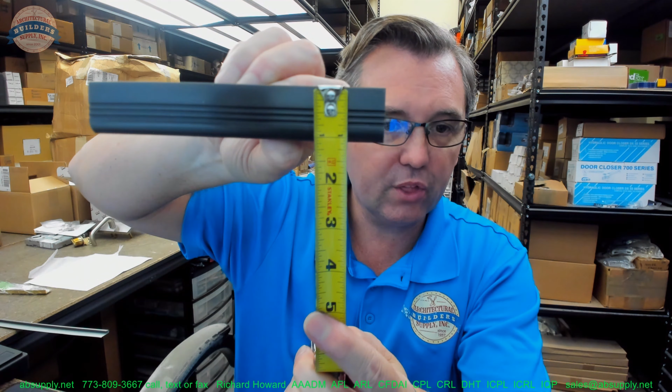Okay, so this is listed in lots of different lengths. 2 foot to 8 foot are probably listed. You can have really any size you want. We're only limited by the length of the extrusion. And this extrusion may be 16.5 feet for all I know at the factory. I want to measure this so that I give you all of the dimensions. Overall width, about 1 3/8 inches, and that's what they call it out as. 5/16 overall height, very short little guy here.

Okay. Now, again, this is a sample piece. If this was the genuine article, you'd have a brass hook strip. You'd have holes drilled and countersunk, and as a general rule, not an absolute rule, for whatever length you have, if it's a 3-foot piece, you'll probably have 4 holes drilled and countersunk. You'll have screws that will be in a complementary finish, and in this case, it would be brass screws as well. So be very mindful of that brass screw, very soft base material.

If you have need for a custom length, by all means, order the next longest piece or pieces, and simply indicate in the comment field the length that you'd like for us to cut the material back to. And that's what we'll do. The reasoning is, look at the end of that. Very clean cut factory edge, and it's finished.

You go ahead and you cut that. You may not have the best tool for cutting this, and you likely won't have the ability to finish that edge off. Not that you would ever see it, but you might, and you might just want the factory to give you a nice finished edge as well. Okay. Let's switch to the screen view where we can take a closer look at some supporting concepts.

Here is the item that we are looking at now. Admittedly, this is just a 24-inch length, but it doesn't really matter. Here are our dimensional properties of this item. Okay. Brass, oxidized, and oil rubbed. The J-hook included when purchasing the 101. Typically mounted on an existing saddle type threshold to create an interlock with a J-hook or an L-hook, and we're going to talk about both of those here in a moment.

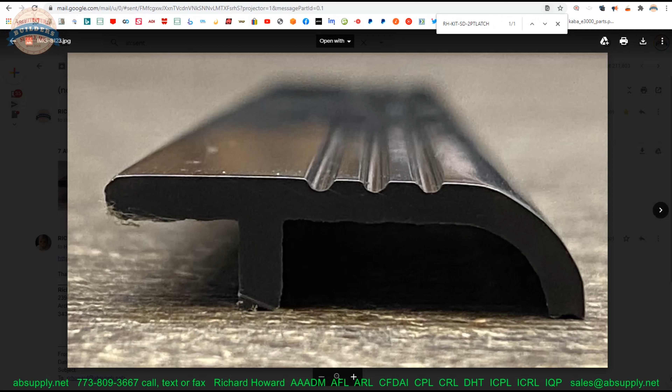I do have some images that I can show you. That's what it looks like up close, cross section. My sample did have a little bit of a nick on it on the corner. You can see that brass tone underneath it.

Okay, so now the item that we are looking at here, there is a link here to the manufacturer's page. When we click on that, we'll be able to pull up not only all of the Pemko products that we sell, but also a link to the manufacturer's website, as well as the catalog. So let's open up the catalog, because I want to draw your attention to what the hook strip is, the J and the L, the 101.

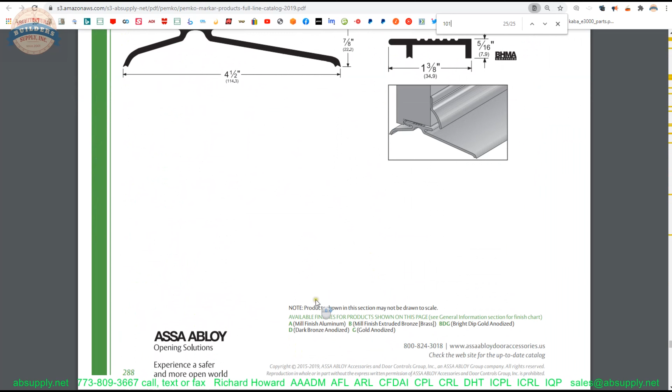Just doing a find function on our keyboard where we can get to that interlock style threshold, and there it is. Okay, so that's what it looks like in the catalog. The 2019 catalog has it on page 288. So this section is residential thresholds. That is generally where you will see it, and that's a great image showing what the installation would look like.

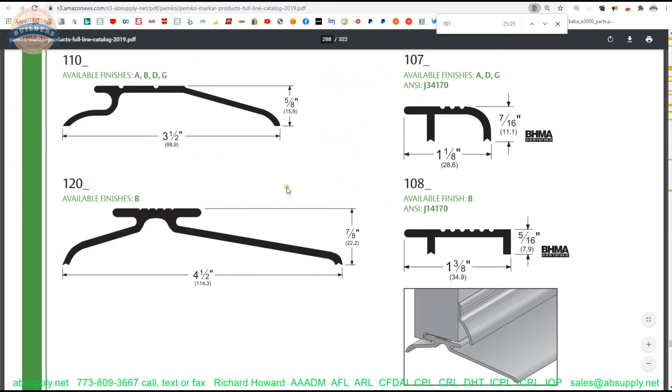Having a drip cap is really low-hanging fruit as well. I would always recommend the inclusion of a drip cap. You can see that there is this more flat profile that they have here, and then a taller version in the 107. Other interlocking thresholds are also here, and here's the page I wanted to draw your attention to.

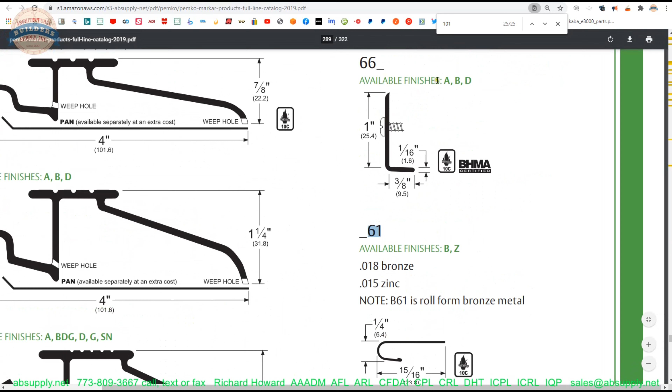The J hook is the B61. That would be the appropriate part number for this item. An L hook would be a 66B. Okay, so where would you use that L hook? Well, let's illustrate where we would probably use it.

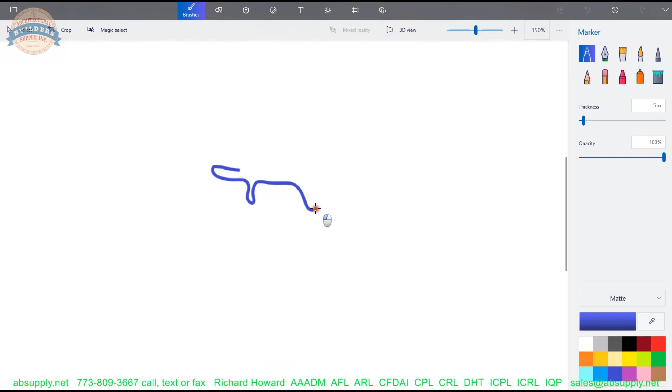Sorry, I am an awful artist. That's to be sure.

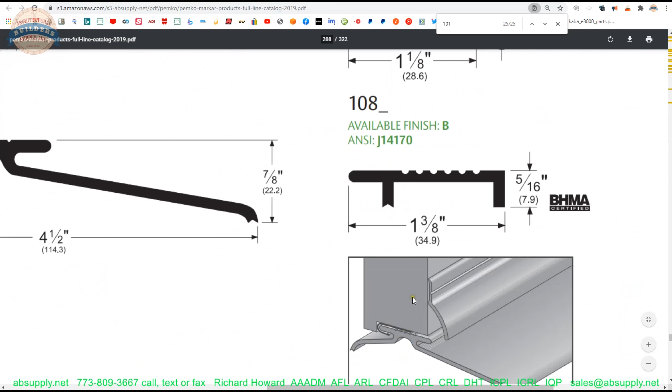So that's our 101. So you can have your door. So as we showed in this image here, you get the concept of how that's going to install. Okay, but that's only one way of doing it, and in fact, that's the less common way. So you can certainly install it like they're showing here, where your hook comes around like this, roughly speaking.

Now, most people are just going to install it like this. That's really how you see it. But to make a mortise in the bottom of the door is a lot more elegant. Better way to end up doing that. Okay, so however you go about doing it is how you go about doing it. What's nice about it is it will draw that door down further and render a more effective overall seal, because it's not just straight across at this point.

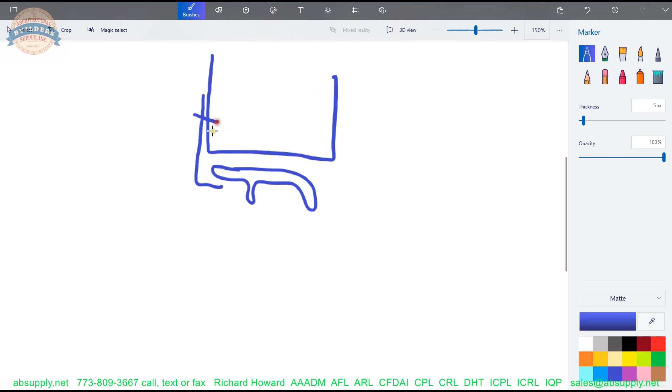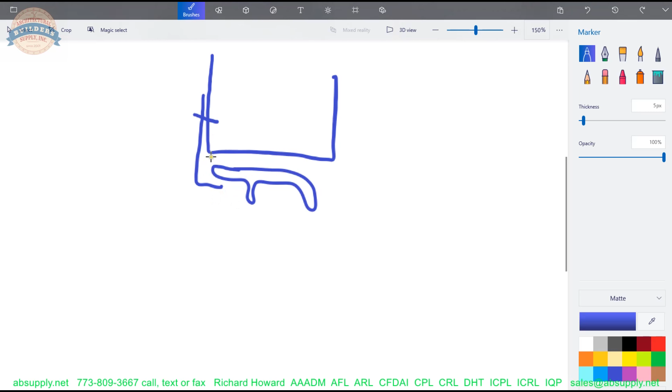Now that L hook would really only be done like this. Okay, you nail it here. You do see them. They're unsightly in the sense that once you see that L hook, it's hard to forget that you saw it, where the J hook is clearly concealed. But that's where the L hook goes, and your door obviously swings in that direction. No real opportunity to mortise the bottom of your door like that when you're doing an L hook.

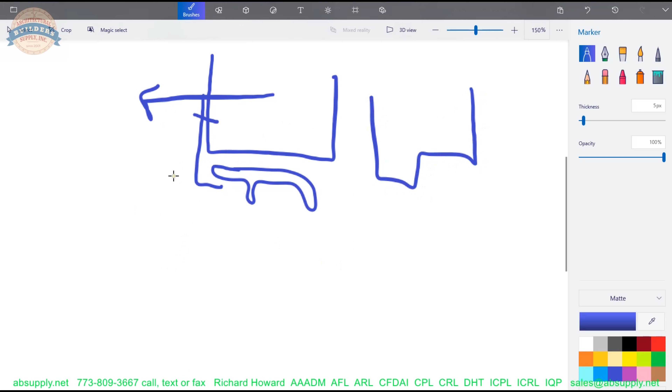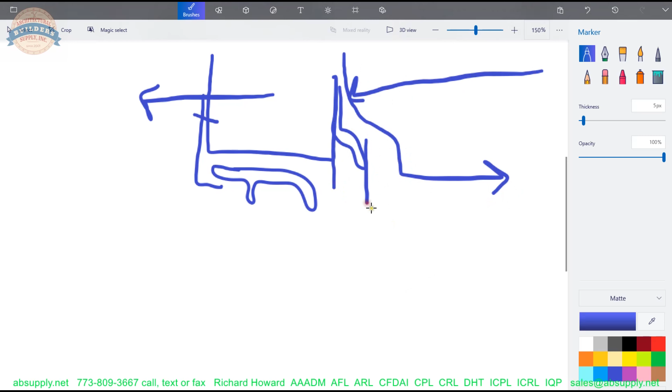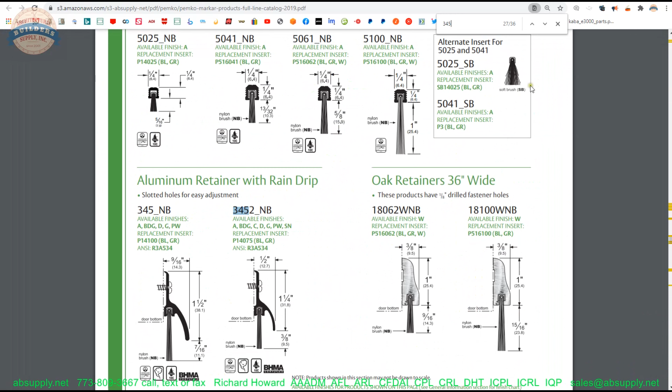Okay, adding that drip cap out here is a really great idea, because any water that hits that, it's just forced away. Rather than stopping it here, you're stopping it here. Be advantageous. Let's take a look at the drip cap. Let's search for, I think it's 345 is going to be the part number for that. I think we may have just blown past it. It's not 345. Just waiting on the document to index.

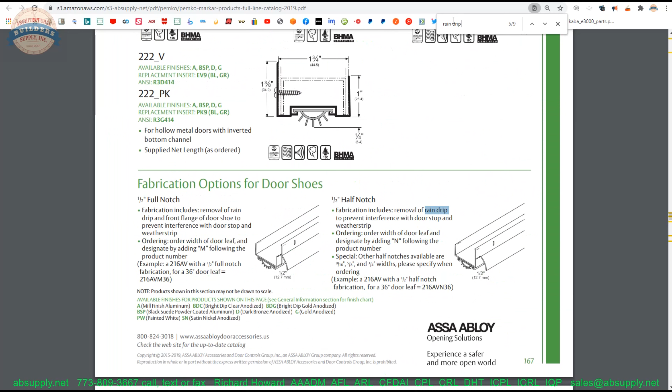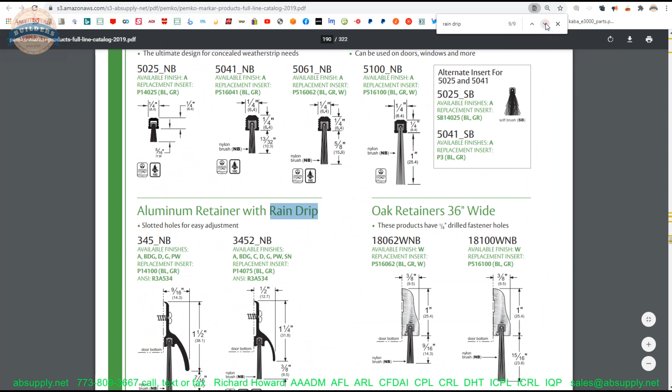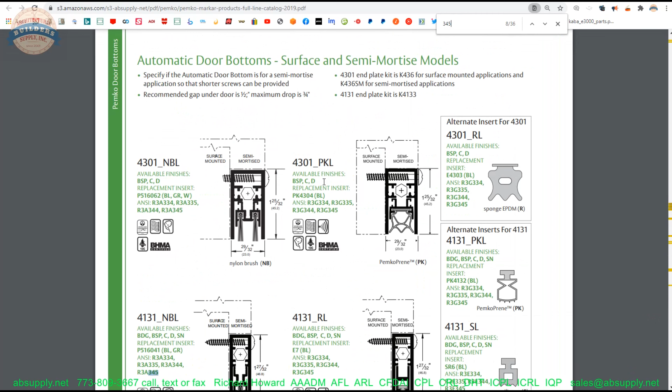Okay, Pemko calls it a rain drip. And they certainly come integrated with door bottoms and sweeps, as you see. Here's the unit that goes over the top of the door. That is a drip cap itself. But the one that will go at the bottom of the door, and the part number is definitely 345. I haven't been able to find it in my site. Very strange. Here it is. Forgive me, I've blown past it.

Right here, 345. So you can do a 345 and a B base material for brass, and then do an oil rubbed bronze on it so it matches. Okay, that'd be a great option. The rest of the catalog, of course, is very handy for you to review all things Pemko related. Let's wrap up this video on camera.

And I do happen to have a 66B, that L hook. And here it is. So it'd be a great way to show you what that might look like. Just like that is going to be the idea. Very heavy piece of brass as well. The name Pemko is quite synonymous with all things weather stripping related. Not only thresholds that are interlocking in style, but interlocking perimeter gasketing as well. Thresholds, perimeter gasketing, door sweeps, a variety of other items.

They are under the umbrella of Assa Abloy, and Pemko's sister companies would be companies like Adams Rite, Rockwood, Sargent, Medeco, Corbin Russwin, Yale, Norton, etc. Lots of companies. Assa Abloy is a European company in origin, so they'll have a giant footprint here, but also in Europe as well. One of the three large multinational, multi-billion-dollar corporations that are really all vying for all of the top-level work that's occurring within the industry.